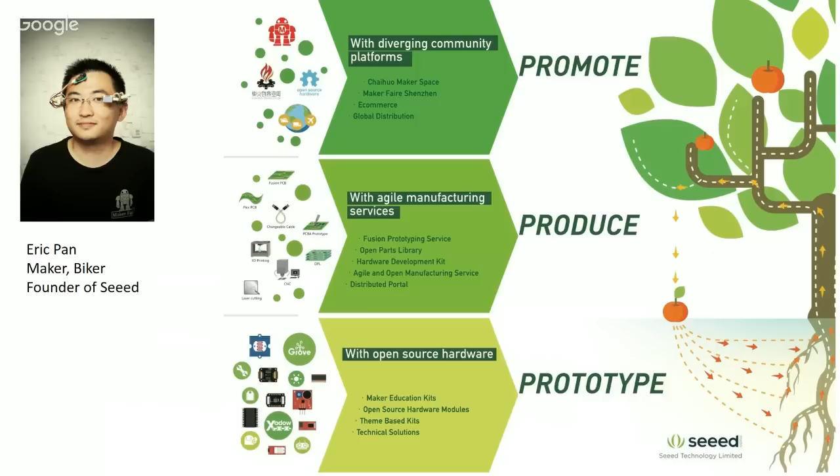Because we have done so many things, we try to categorize what Seeed is and how our business runs. We see the maker community like an ecosystem, and we are playing as one tree of it. So we provide open source modules for people to do prototyping. But what we are going to talk more today is how we help people manufacture in small volumes. And also we help to promote the culture, promote the community. You will find out more by Googling us.

First, I would like to give you an overview, because I think it's very important to have a different mindset growing from one piece to many pieces. We have a lot of workshops about prototyping, but too little workshops about how to manufacture things.

So if we look at the world from an open hardware perspective, it's more like a pyramid. All the makers have ideas, everybody has ideas, but whenever you bring them into a prototype, you become the maker. You're actually growing from 0 to 0.1. But you have to go further sometimes to have the first working engineering sample. You become a very veteran maker. I think a lot of Fab Lab students are working towards this. Like I saw from the last lesson, you have done some PCBs by CNC, and then you'll be soldering your own devices first.

But today we are going to cover how to grow from one piece to like 1,000 pieces. Whenever you have 1,000 pieces manufactured, you are actually becoming an independent product maker. You can call yourself a hardware startup, because you are not making one product for yourself, you're actually benefiting a larger audience. If all stars align, if everything goes perfect, you might want to ramp up to 10,000 pieces. That's where mass production actually happens.

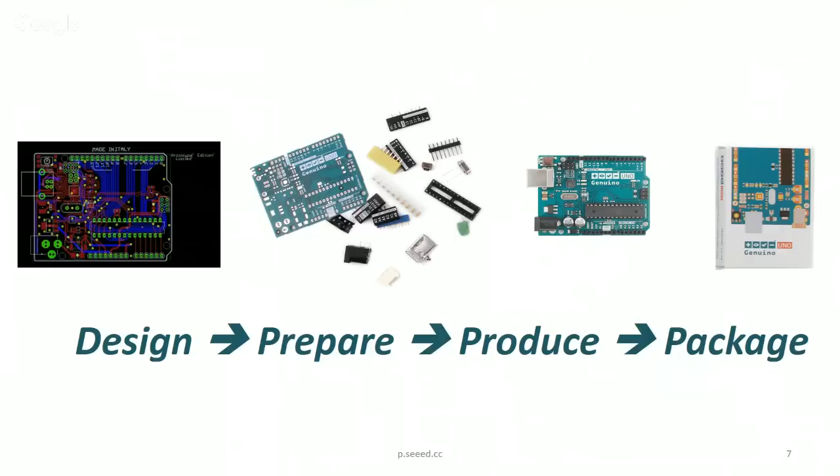None of this process is easy because you need to balance between the 3 elements: the cost, the quality, and the schedule. They are very much intertwined. If you change the cost, you might affect the quality. If you want to pull in the schedule to deliver to the market faster, you might increase the cost, for example.

Because the world itself is analog, the world itself is very random. You manufacture the same products with the same setup, same material, but you might also have some randomness, thanks to quantum physics or anything beyond that. What we need to focus on is to control the result inside our expectations. There are so many ways to do that, and so many factors that contribute to the defects. There are so many systems, knowledges behind that, but we need to understand that quality is equal from the design to manufacture to deliverable. The only matter is how do you promise to deliver and how do you achieve it.

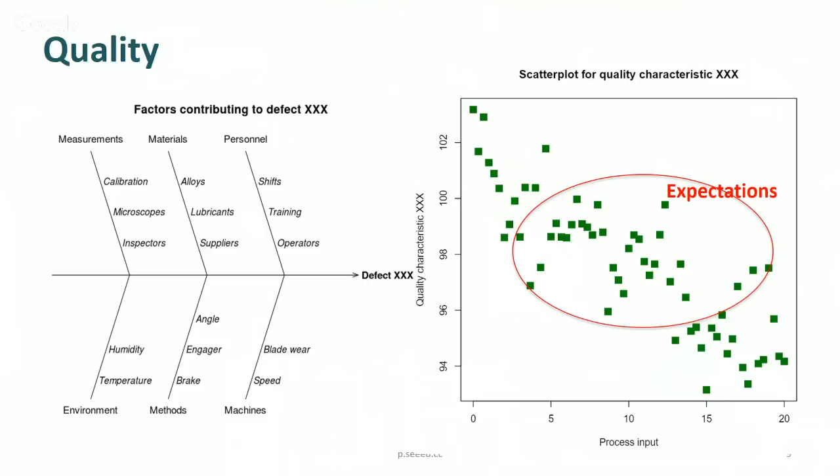So it can be affected by the personnel who operates it, the materials, the measurement used to evaluate, and also what kind of machines you are using, the methods you're using, and also the environment might also affect the quality.

And it might be a very nightmare for a lot of hardware startups because the schedule is always unstable. We have already seen so many Kickstarter campaigns that might delay for even more than 1 year, even cancel. So for the schedule, for the manufacturers, you have a lot of components that need to or shall arrive on time, but the supply chain is very dynamic.

For example, there might be some turmoil in some countries. For example, in Tianjin port in China, there was an explosion. And the result is, in that port at that time, there was an OLED shipment, and it was totally destroyed in the disaster. So in the following few months, we didn't have enough OLED screens.

No matter how good a plan you have, these kinds of disasters are out of control, and the supply chain itself is not static and might change. So we need to adapt to the changes. And also the production line has its queue, because the goal of production lines is to keep running to increase the utilization - they cannot wait for you forever. Whenever a new production comes, it usually needs to wait for the last batch to finish and start new ones. If there is any problem, it has to go back and wait again.

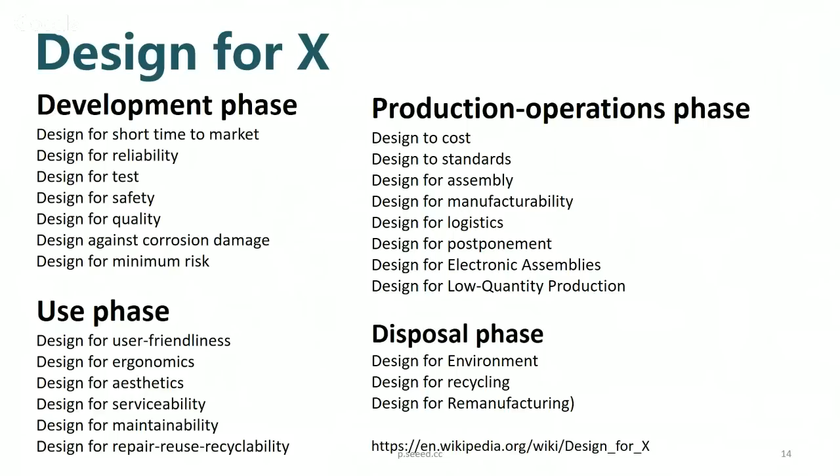We have a lot of issues because people come to the field like a software team. Software team is like a band. You might need only 3 or 5 people to come up with a design to make it working and post them on iTunes. But for hardware, you actually need a big orchestra.

You need a whole team with established knowledge of about issues about DFX. So a lot of teams, they come to play orchestra with a band. That causes a lot of issues because of so many things that you don't know.

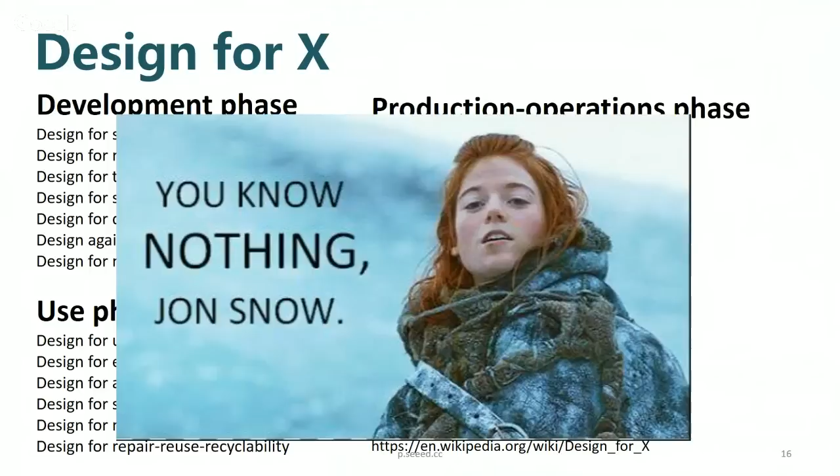You know nothing. It's slow because you know nothing. You didn't know so many things that the factories didn't know, that you are not a professional like their previous customers. Because we are newcomers to manufacturing, this causes a lot of problems because of the inequity of knowledge.

But the remedy, I think we look at manufacturing, design from it. A very important element inside of this is open hardware.

We use a lot of open hardware for prototyping. Maybe on your table you have Arduino, Raspberry Pi, so many open things. But it's also a perfect tool for you to consider the supply chains, because you're actually sharing the supply chain with other people using the open hardware.

For next steps, I think we need to open source the manufacturing processes. So we will understand all the strengths by looking at the manufacturing process itself and come back to our laboratory to design something that matches the process. I think that's a hope for Fab Lab, and also what we are trying to do is manufacture decentralized. It should be more like a service covering different locations with the same process and materials.

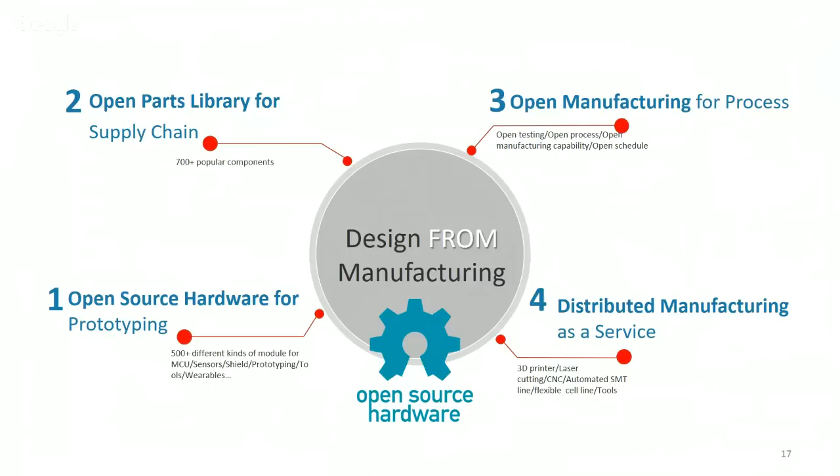I think that's where we can make the DFX or manufacturing much easier, because by different teams, different products, we are actually training ourselves and sharing the knowledge among different projects. That's a big word, but let's see the details.

About 3 months later, he started to make engineering samples to shrink the size, working with maker groups to do a layout over again. After half a year, he finally could use crowdfunding and SNS promotions to get the idea, 20 years later, into the market. But you see, the open hardware has facilitated the whole process.

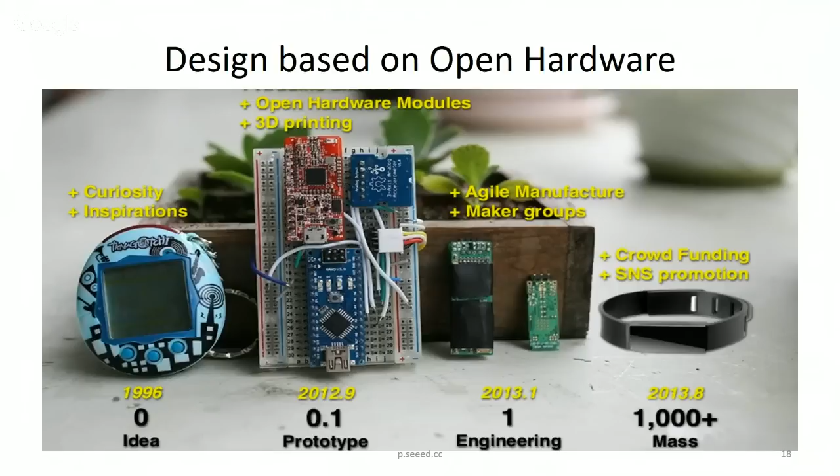Because we are having more and more platforms to suit different usages, and we have more modular sensors and actuators - they are actually combined together to come up with a whole solution. And we will have more knowledge sharing and support from different channels, of course, including the Seeed Wiki.

We also have project inspirations from Instructables, from people's blogs and Twitters. We are not only making the prototype easier, but looking at what people has done, has failed, has succeeded. We can follow their paths to facilitate the way we manufacture new things.

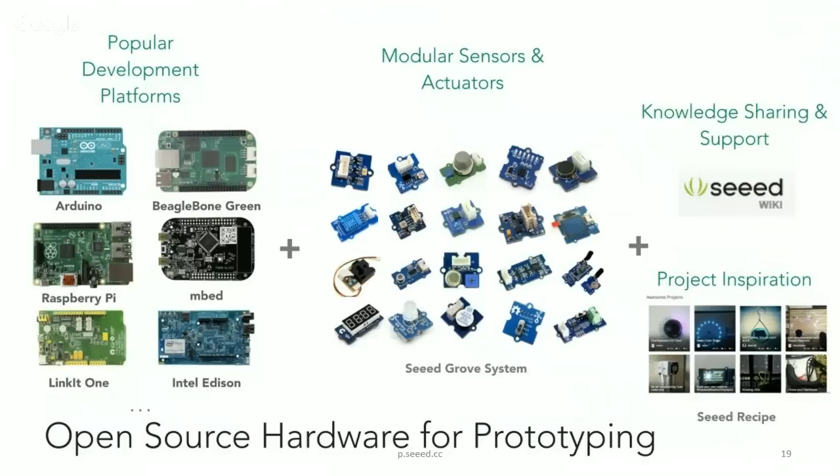Also, thanks to the CAD tools, they are becoming easier to use. They are becoming free, and they are more like cloud-based. You can actually open some cloud-based CAD tools and collaborate or find some experts to help you.

Because I think in the future, we don't need everyone to get very professional on how to design a circuit, but you try to reuse existing modules and try to come up with your own complementary circuits easily.

If we look at the PCB design process, it starts from need - what do you want to accomplish? Whenever you have a concept, you can use some open hardware breakout board modules to validate. And you will have the schematics to map the electronics together, and you do the layout to place the components where they are going to be. Then you need to do the routing, verification.

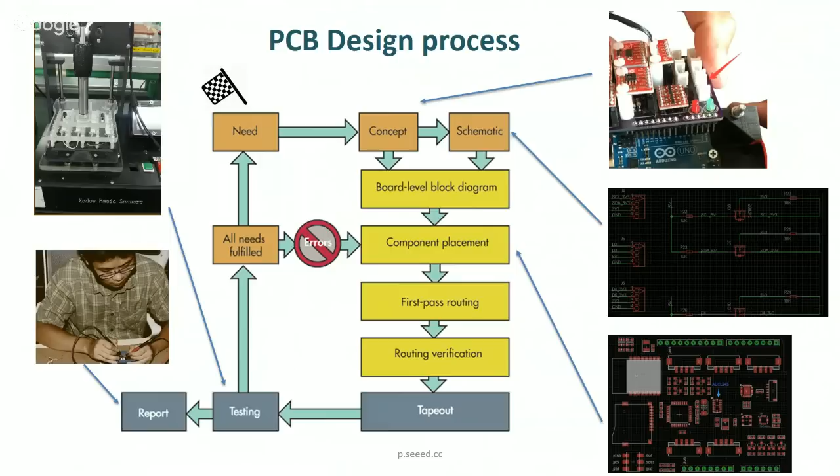So if everything is perfect from what you have seen at this stage, we can move on to prepare - we need to gather all the materials together. If we look at electronic products, I will show you some examples by hand, but there are so many categories. We can start from a few.

For electronic manufacturing, the majority of products have to start with PCB, and also the pairing stencils for solder pasting. One thing for that is quality. When you make the first PCB, it might be right, but whenever you manufacture several thousand pieces, there might be something wrong, like even for the printing of the silk screens.

I think for a lot of us, the major issues are on the components, both active and passive ones, like the ICs, resistors, capacitors, because you might meet issues on lead time and also quality. The lesser risk ones are standard mechanical components, like rivets, screws, nuts, and standard accessories, which might be very low risk as well because they're very substitutional.

For packaging materials, you need to consider them because they're part of your product, but they might also affect a lot on quality. The materials you use, the printing, the quality, the color—that might differ from what you were thinking.

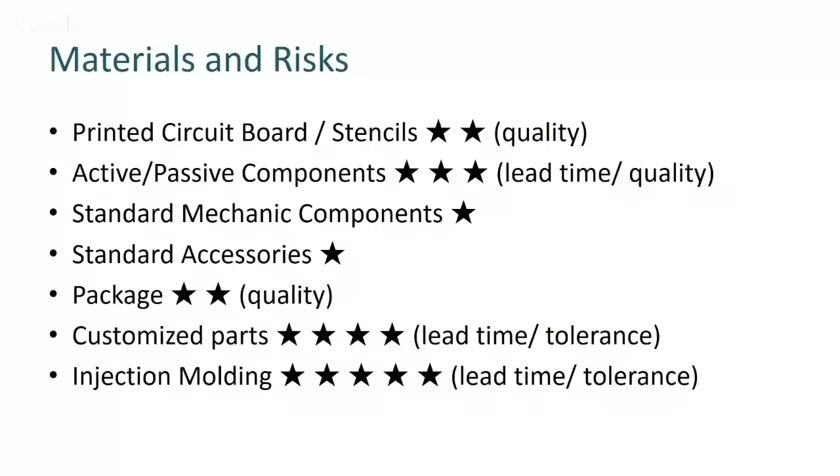If you really want to do injection molding, that's the most difficult one because you'll spend a lot of money, and the lead time is usually over several months, and in the end you still need to cover tolerances. Don't get too frightened, because we will see the bill of materials template.

This is a very normal, very simple one. We don't have so many items on it, but that's actually how you describe the things on your electronic board. You might have seen a bill of materials, but in real manufacturing, if you give the task to someone on the other side of the planet, you must make sure everything is right, everything is clear, and everything is feasible. I'll send the slide later so you can look into the details yourself.

There are some hints for bill of material DFM. Please don't assume people know what you know. I've seen so many bills of materials that just say, oh, here we need some screws—that's it. But how could I know what kind of screws you want unless I have the samples, unless I measure it? So don't assume people know.

You need to always have a plan B. What if the components you used are extinct? Usually we just take some components from our desks, or sometimes unsolder them from other products, but that component might be extinct or unavailable. So try to have a plan B.

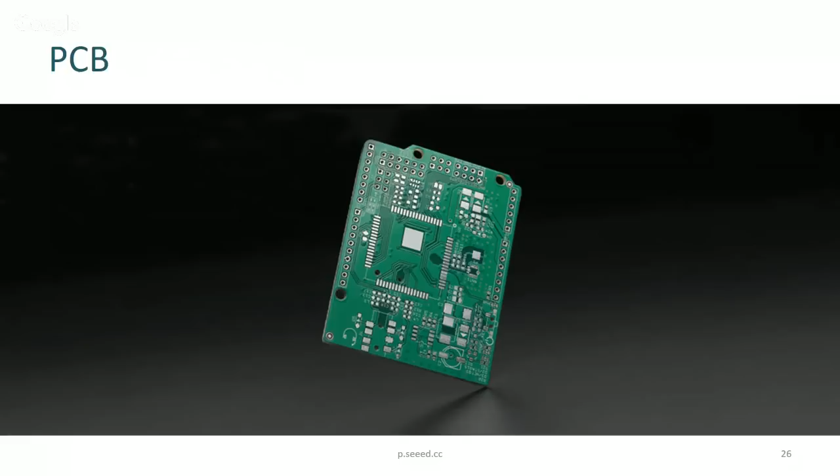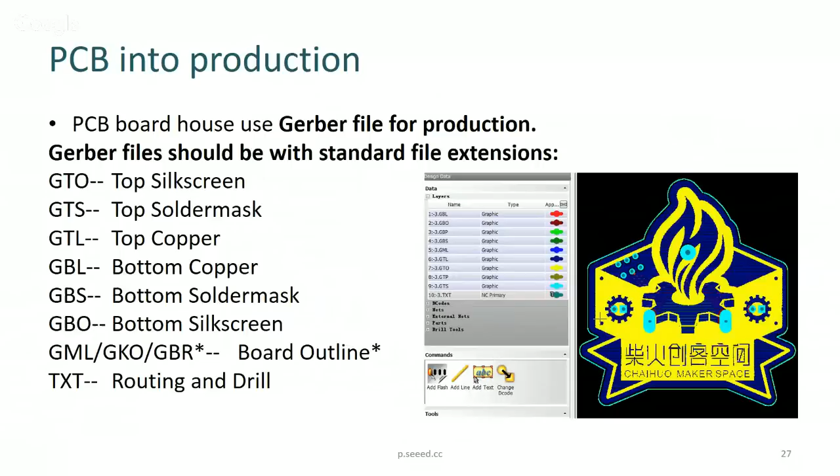Whenever you bring a PCB into production—you'll learn more about this later in Fab Academy—there are different layers: silk screen, solder mask, copper, etc. Here's a video; if it's too much latency for you, you can open the links at the end of the slide.

So this is one way of manufacturing PCBs, but there are other ways besides the homebrew PCB. We see companies like Voltera trying to ink-print circuits, and we have OtherMill, or you can use a desktop CNC to cut low-precision PCBs as well.

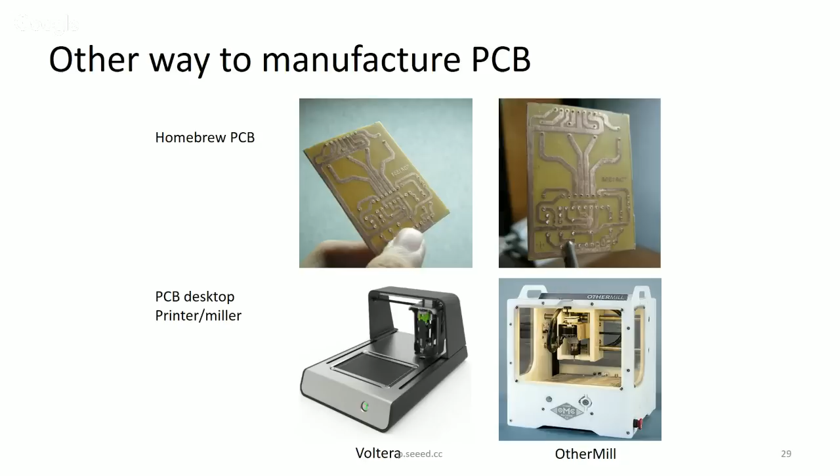For PCBs, we also have some hints for design for manufacturing. You need to look at the supplier's process spec. If your supplier is your CNC machine, look carefully at the precision it has. If you use a fab house to do the PCB, look at their spec and leave some buffer if possible, because that will increase the yield of the PCB.

And whenever you're designing the PCB, you need to think ahead about how people will assemble the components onto the PCB, so you need to make sure the components that need to be polarized are marked clearly.

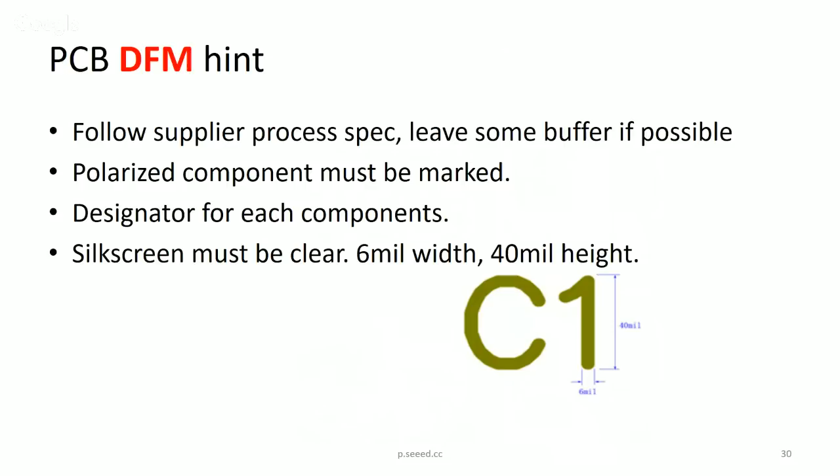But to do that well, you need to control them to like 6 mil width and 40 mil height. That's something that can guarantee the printing quality. Also, after you have the PCB and want to bring it into manufacturing, you need to have the stencils.

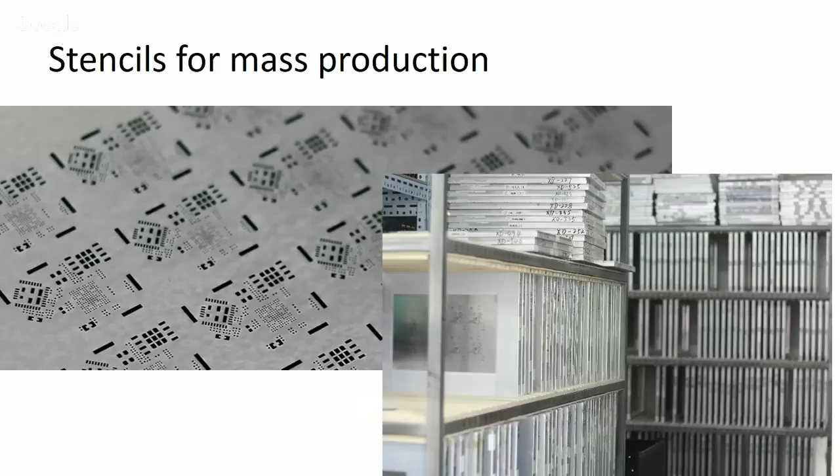It's very similar to silk screen printing, but now you're printing with solder. For each of the products, you might have a different stencil, and that causes a lot of waste. It's very critical, and we also have a room full of all the stencils, used and expired.

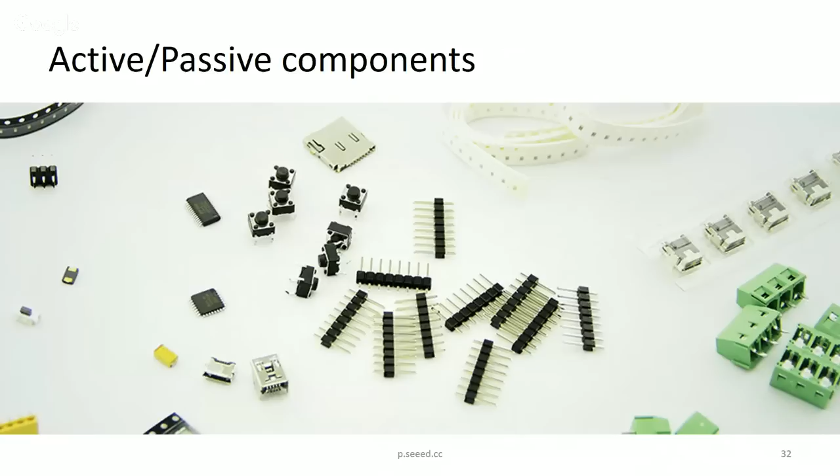You might be very clear about active and passive components, but I don't have enough time to explain in more detail. One rule is to try to use popular components. Where can you find popular components? One simple way is to find the most popular open hardware board, see what components they're using, and try to reuse the components they use.

Like, for example, ATmega328 — that's something you might want to share. For regular resistors and capacitors, that should be no problem. But if you choose a button, try to use a very standard, very popular button, or you might get jammed for a damn button.

We have an example here where we tried to calculate this. Among the projects we've done, the most popular 100 components consist on average of 30% of the bill of materials, which means sharing the library can mean sharing the supply chains. They can reduce cost, lead time, and improve quality, and it's a way for people to share knowledge.

Like Espruino, a project we did for a Kickstarter campaign a long time ago — it went from PO order to shipping in only 20 days. The only reason is that it uses a lot of common, very popular parts.

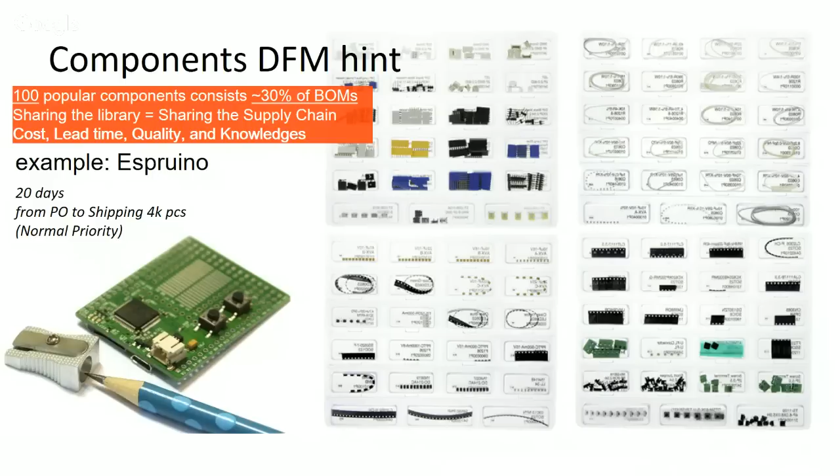We'll go into more detail — we have a new library called the Open Parts Library, and our friends at Octopart also created an Open Parts Library. You'll always try to work with the community to select the most popular ones.

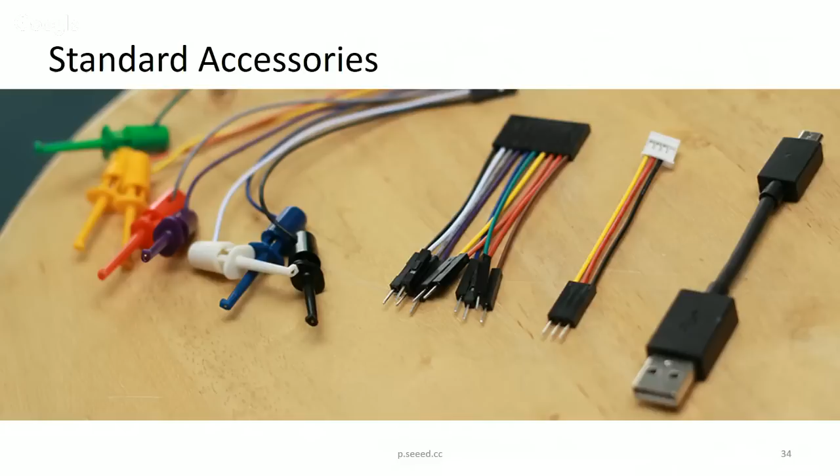We'll also have more standardized accessories, since they're too standardized. For small volume, you don't worry about them, but if you're in a larger volume, you might need to find a suitable factory and make a long-term delivery plan with them, to make sure all the quality aligns with your specification. Packaging is something you cannot avoid either, and it will totally affect things, but it's not the focus of our topic today.

But remember, it's also part of your bill of materials. You might want to include the static plastic bag, the stickers — everything into your bill of materials. Or you might end up waiting for them to complete the whole project. And then for customized projects...

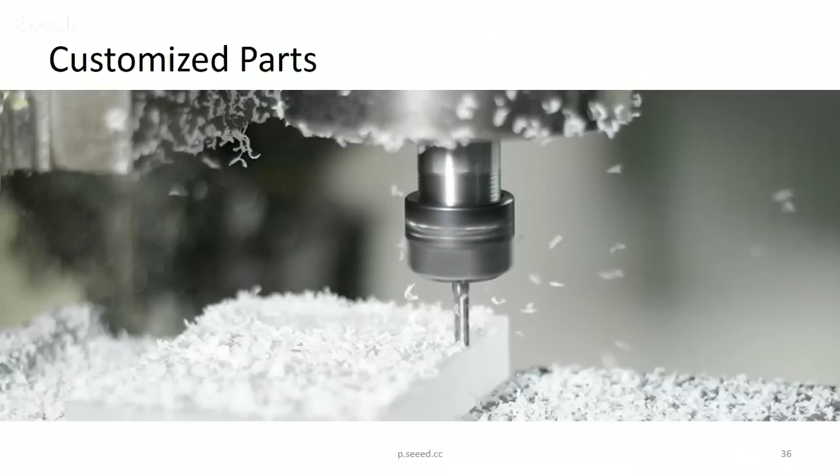I can give you an example where we try to align mass production factories with our laboratory, which means if we can customize on our own equipment, and we find a factory that has thousands of the same equipment, it's much easier for the customer's customized parts to get duplicated. As for injection molding, I think it's a very painful process to introduce, so we'll leave it for some other time.

And finally, imagine that we are cooks, we are chefs. We have all the ingredients lying on the table. And the nightmare, the real nervous moment, comes whenever you assemble. Only by assembling can you find a lot of the mistakes — you realize, oh, I have bought the wrong materials.

It's not fun, and if we look at the whole assembly and test process, they can be very complex. But why are we doing assembly and test?

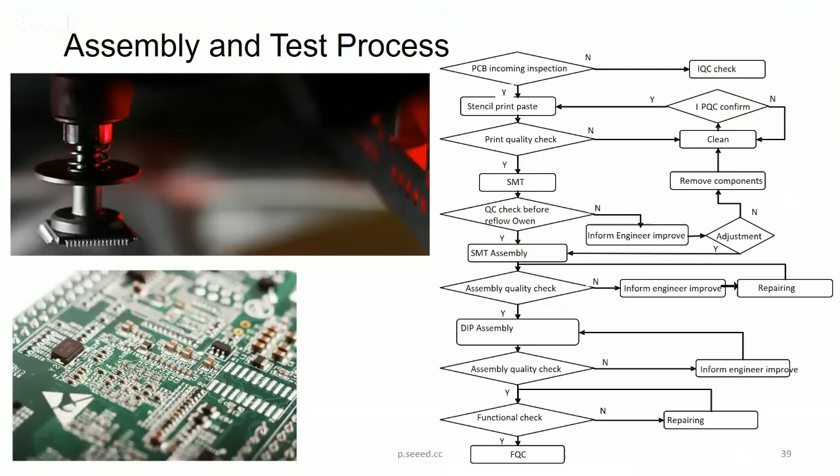It's because you don't want to do it yourself. You have to make these tasks as easy and repeatable as possible, and give them to someone you don't know to accomplish. If people don't know you, they need to follow some programs. We talk with all the files, all the SOPs, standard operating procedures, to make sure we have the right deliverables which match our expectations. So it's very important, and we need to respect the whole process, or you will be affected by what you have designed.

So this is how we put the solder paste onto the PCB board. The first layer is the stencil, and the solder will go down to infiltrate into the PCB itself. That's very simple, but this also requires a lot of precision, and the way you do the stencil might affect the result.

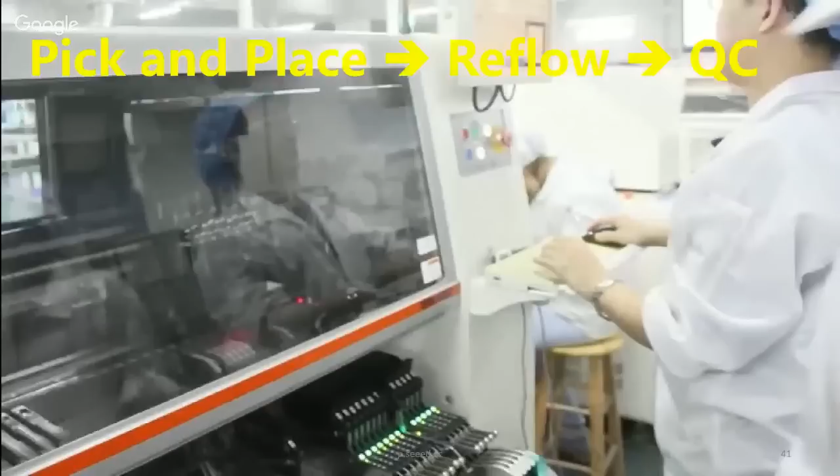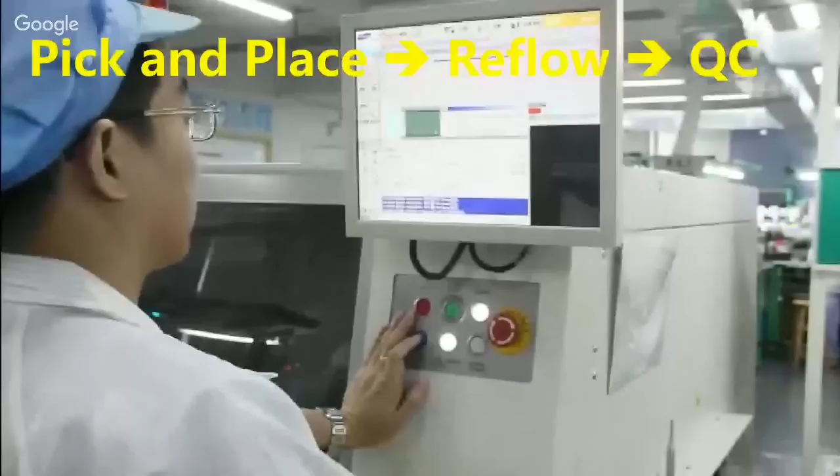Next is the pick and place machine, and also reflow. You might have already seen the pick and place machine. They're actually doing something very simple: putting the components onto the PCB which already has the solder paste. But imagine you have to put so many components onto so many PCBs, and make sure they have the same result, make sure they're fast enough to save time, and make sure they don't make stupid mistakes.

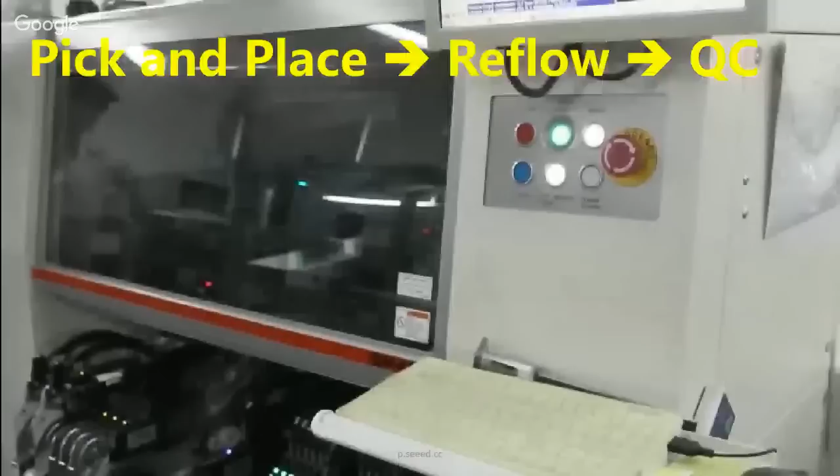So you will see on the screen they have some optical alignment. This is the mark point, and this is the pick and place height. Sorry, it's a bit dark. On the bottom of the screen, there are reels of components.

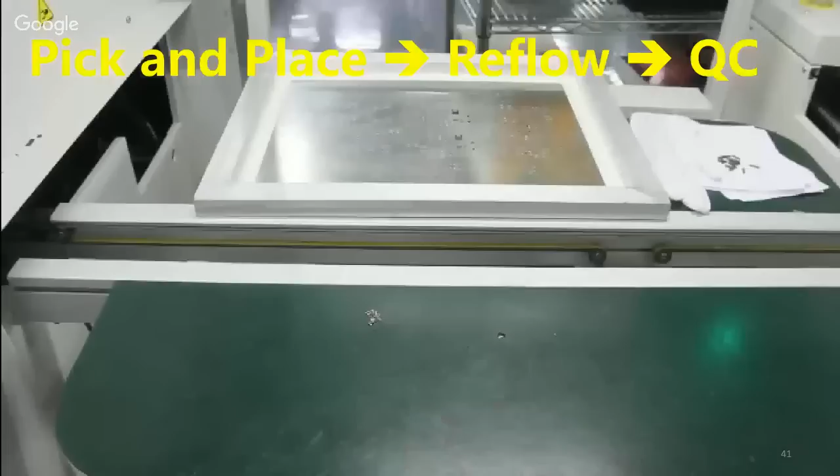Please, if you have time, watch the video over and over again, because you will know how the machines work. And on the other hand, you can design according to the performance and behavior of the machines. So whenever pick and place is finished, the components are like glued to the PCB.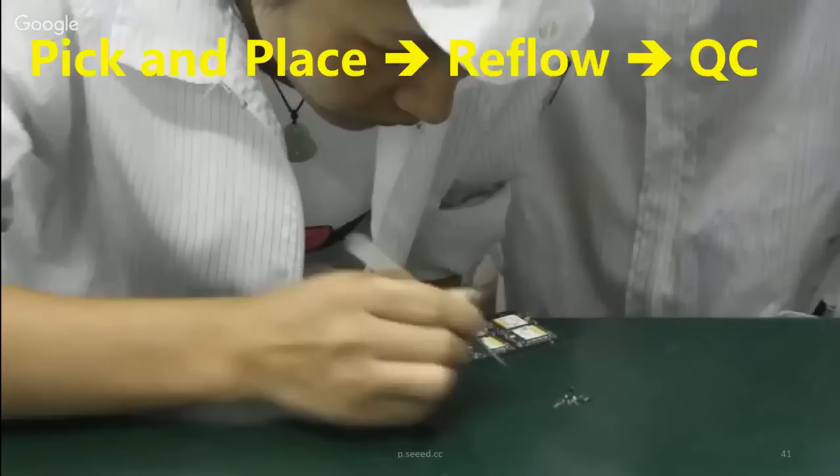They will do a visual inspection to make sure most things are right. But they are like uncooked - they need to be cooked. And if there's something too big to fit into the pick and place machine, sometimes for small volume we use hands manually to put them onto the board again. And that's the oven - it's actually an oven, but with more precise temperature control.

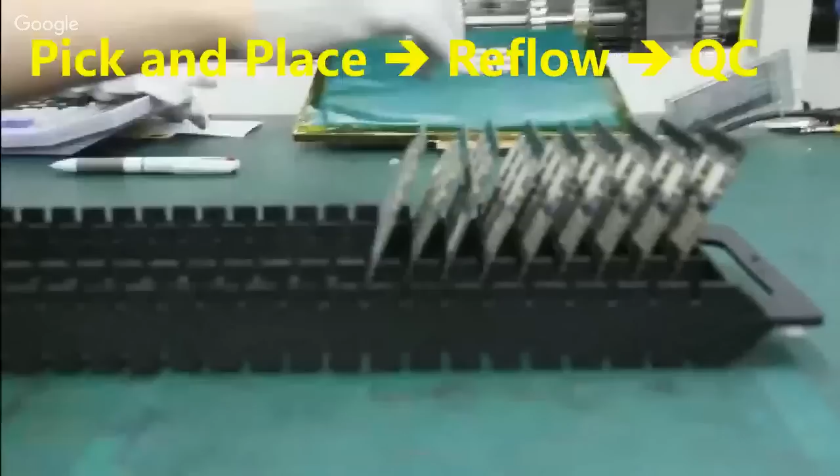After going through the oven, we mostly finish the assembly process because all the components are in place on the electronic circuit board. And then they will do the QC check again. I will show you some examples of why we need to do so many steps to control quality.

As we just explained, the reflow oven is an oven, but the difference is they have several zones. Actually, the more heating zones the reflow oven has, the more precisely it can be controlled. So it has preheating to make sure things are warming up, and then thermal soak, to make sure all the components are warmed up to an extent that's ready to be reflowed.

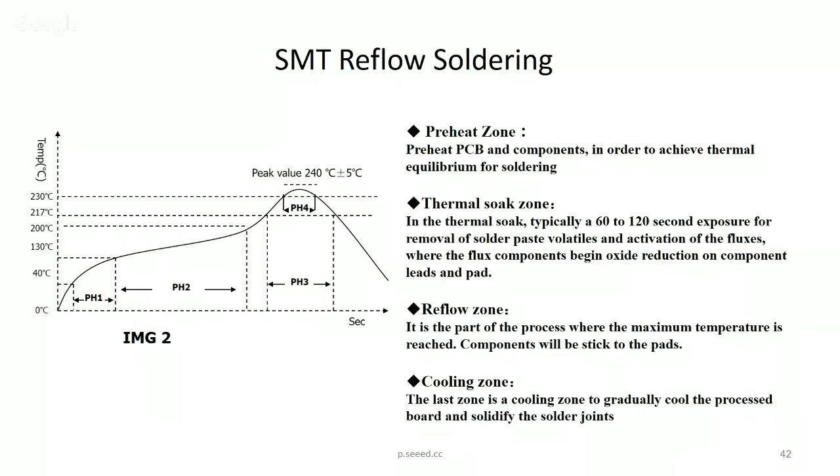I don't think I'm going to explain so much about that, because you can dig into the details, but it won't affect much about what you've done for design. But it's good to know. And more important for us is to understand the issues - we are sorting the issues.

The biggest issue for SMT is like tombstoning. The SMT components should line up perfectly on the surface, but sometimes one end comes up because the components might not match the dimension of the actual design - meaning the PCB footprint doesn't fit the component itself. So making sure the pad matches the package of the components. Also, we have soldering issues, meaning the solder is not stable, not totally heated. The cause is actually the pitch - they are not matching the components' dimensions.

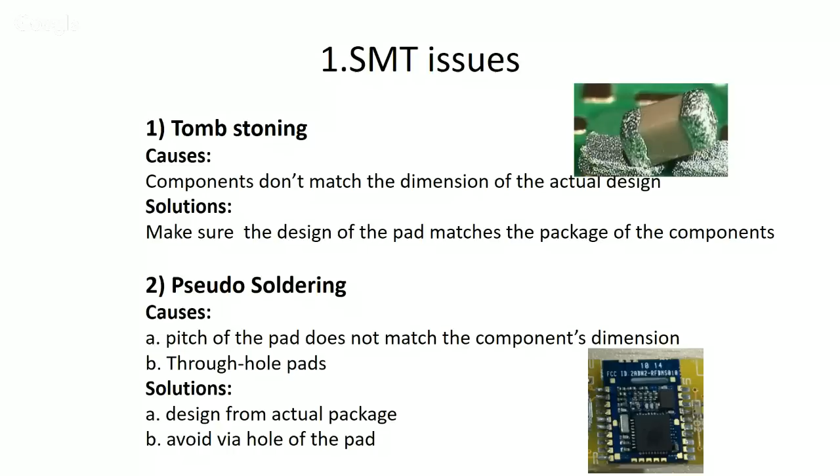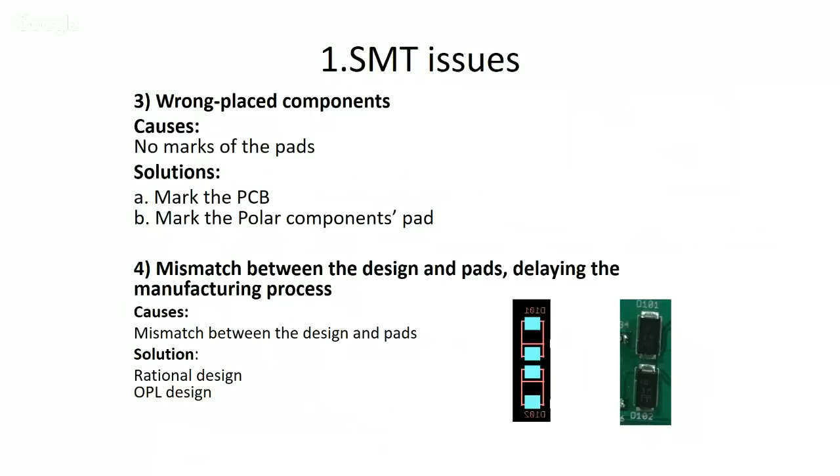You might get your design working in the first piece, but imagine in the long run, in a more complex process on the other side of the planet, they might have more issues than you expected. Also we have more problems, like there's no mark on the pads, so there might be errors if we have to process manually. And there might be some mismatch between design and the pads, causing problems in the manufacturing.

So these are some specific cases, but generally speaking, I think we need to have some compassion for machines. Machines are not slaves, they are our partners, they are helping ourselves. So we need to understand how the machines work, and comply ourselves to try to collaborate with the machines to make sure our designs can be easily done by the machines.

From that, we have one more tip: we need to align the same components in adjacent order. For example, from the video, the pick and place machine gets the components from the reels and puts them onto the board.

So if we target the same reels, it can be much faster than switching to different ones. You should leave enough margin to the edge of the PCB, because there will be some belt on the edge, and there might be some grippers. If you put the components too close to the edge, they might be moved. Also, in the video, we're soldering them on one side, which means if you put even one component on the other side, we need to do it over again. So let's try to put all the SMT parts on one side of the board.

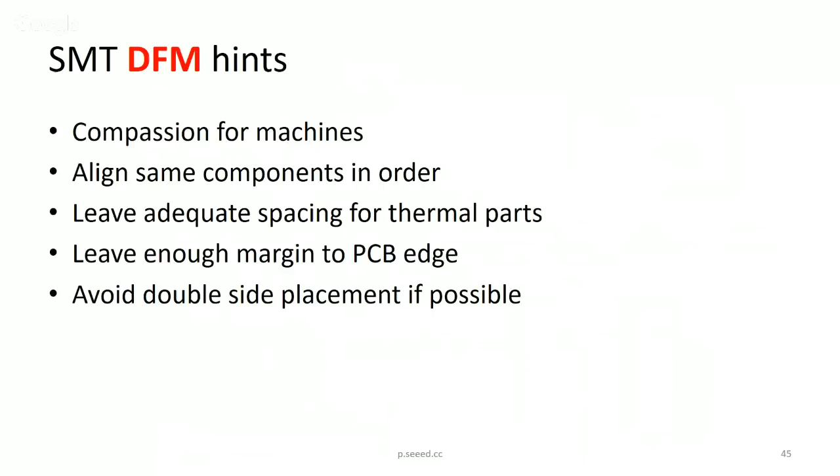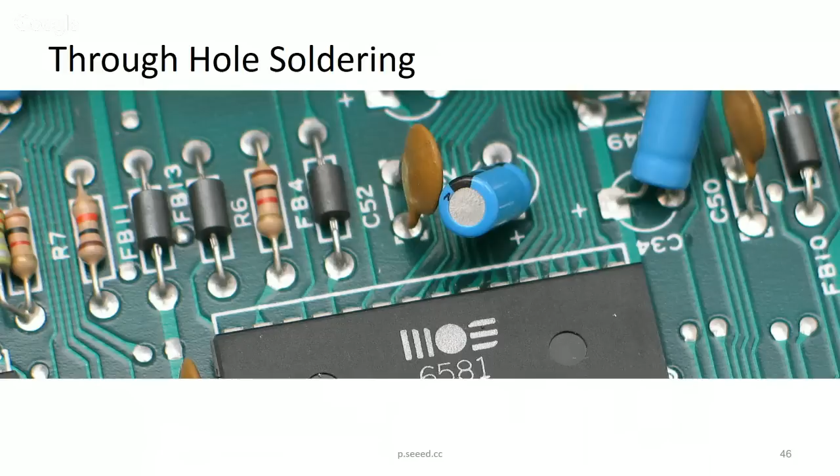Especially for the open hardware community, we have more through-hole soldering than everyone else. It's easy for hand soldering to verify in the beginning of the process, but it's actually difficult. This is a semi-auto through-hole soldering machine. I don't need to explain how to solder them because you can do it yourself, but essentially, all the boards, whenever they're placed in the right spot, sink into the heated solder and come out.

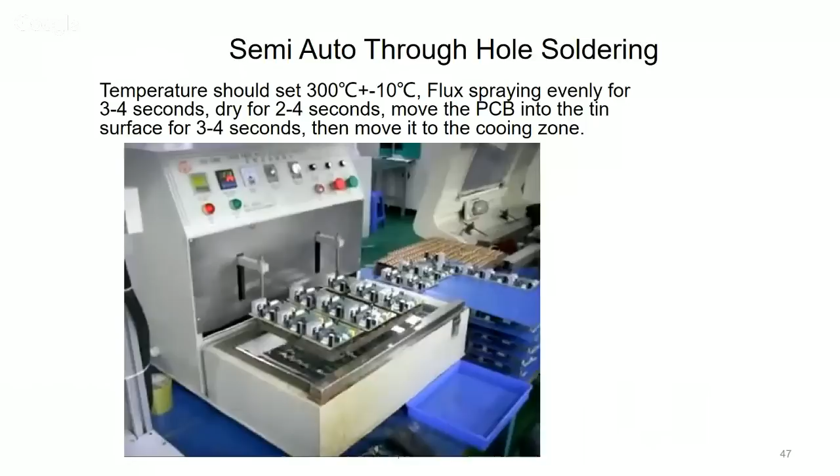We always say electronic manufacturing is very close to cooking. This is the part that actually makes it mature. It has to stay in the hot solder for quite a while. You will see smoke. They are crying, but that's their destiny. After a while, they come up again. Okay, perfectly soldered, or we can say it's like glued.

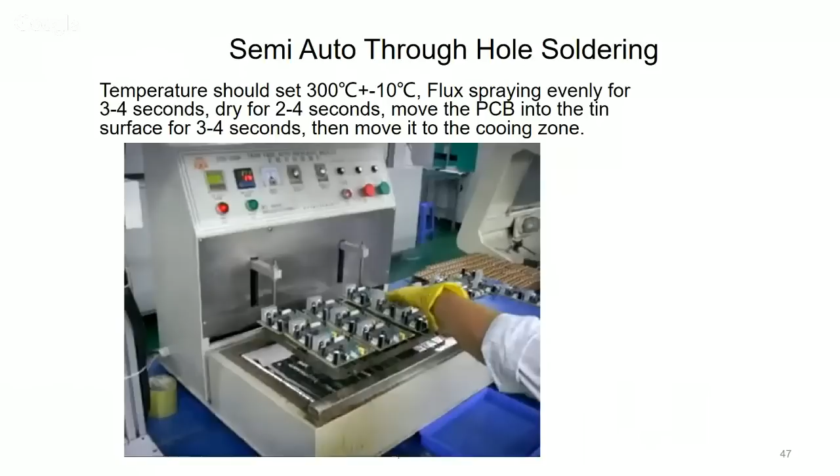Be sure to wear gloves because it's very hot. I think the process is evolving as well because you cannot avoid some issues. Sometimes you have too big components, sometimes you have pin headers, and we have some automatic soldering machines, and this is one of them.

So this is like robots. You may see that they require some specific fixtures, and you also need to program it. Okay, I can watch it over and over again.

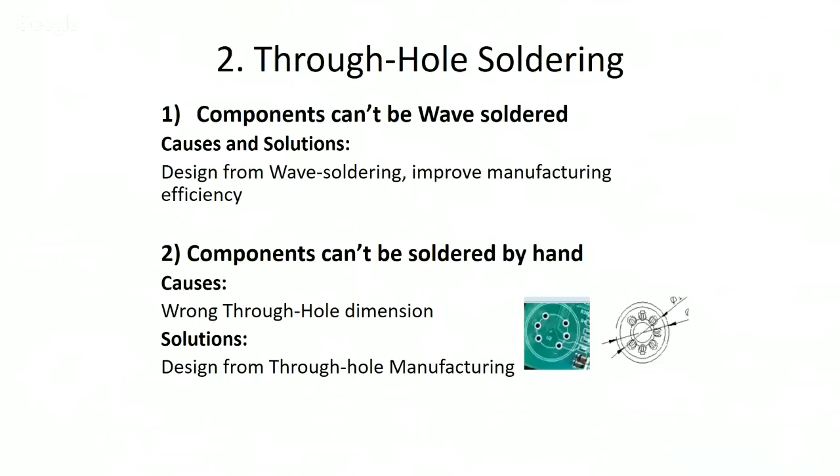Sometimes the components cannot be wave soldered because their design might affect the process. Sometimes components cannot be soldered by hand because the through-hole dimensions are too small to insert the components inside. Or maybe you're buying different batches of components that don't fit into your old designs, so you need to make sure all the dimensions align. Also, there might be too short a distance between two components, making it difficult to solder, whether for machine or human beings.

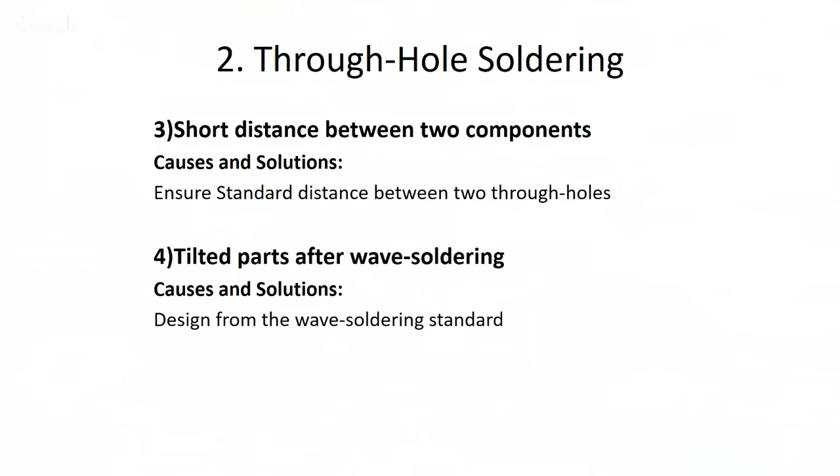There are also some tilted parts after soldering. You might need to strengthen them with some tabs or extra support. So for DFM, if we could come back and redesign, we need to keep space for each component, at least 0.5 millimeters, and ensure the space is enough for manually soldering, repairing, or verifying. More importantly, please avoid through-hole soldering if you can, because it really does not fit for mass production.

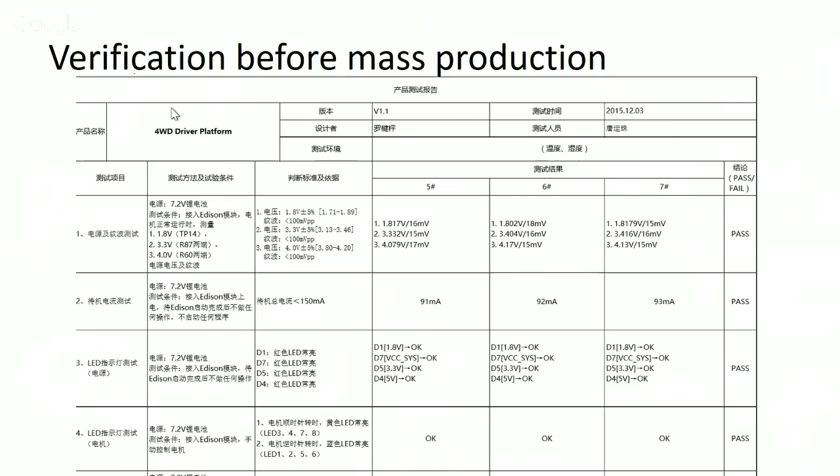This is before we do mass production. We need to do a lot of verifications to make sure the first sample will be working. But this is just a start. We will have some performances, some functionalities we need to verify, but you need to design a plan to accomplish that. There are so many test methods and priorities. Priority means how important it is to us, supposedly for the simple open hardware projects.

PCB inspection systems, there'll be like e-test, there'll be some visual inspection. We don't need to worry much about that because they are usually done by suppliers. Secondly, there'll be ICT, called in-circuit test. It's very common for simple projects, and we have used a lot of them, and you might be using that. And also we have some functional testing.

They are more for complex projects like IC or wireless things. And also for complex logic systems, you might have some JTAG boundary scan testing. I think if you have some system like an Android project, you might be using that, because there's a very difficult way for you to measure all the memories, etc. But for usual testing, you need to combine some of these testings to make sure you cover all aspects of your project.

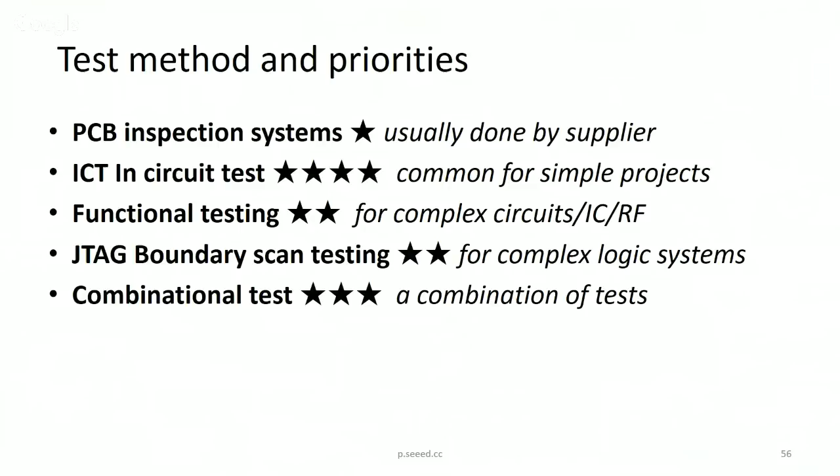So what is a good test plan? I think I have asked some experts and they don't give me a good answer. I'm trying to summarize it like this. So a good test plan is actually a killer, a good killer of defects. The most important rule is like a firewall: no underkill. Underkill means it's a defect, but the test plan does not tell it's a defect and lets it go. So it has to make sure it excludes all the defects.

But whenever you have all the test means to make sure the quality, you don't want to have too much overkill. Overkill means it's a good project, a good product, but you might set some threshold too tight, or it might be disturbed by external elements that you think are wrong. So the best is we examine the units once, and we tell the good from the bad for once. And the testing has to be fast. It's very important that we don't want to, on the manufacturing floor, use half an hour to test one device.

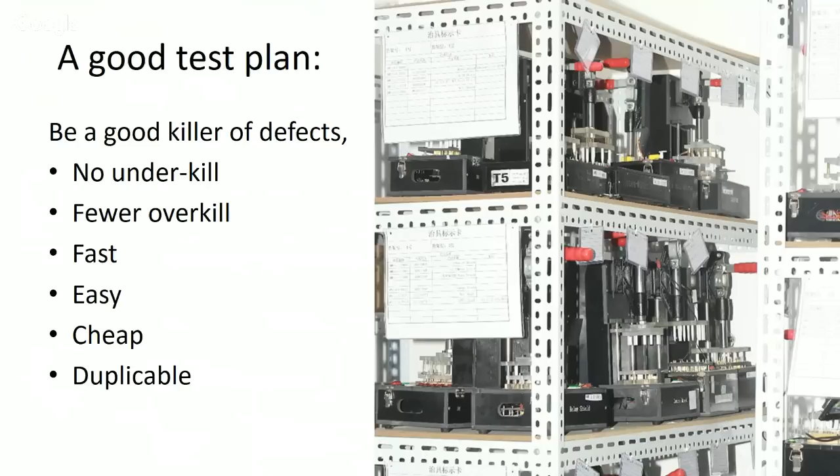Especially for the test fixture, you don't want to spend too much money on that, because you might need to make a lot of them to manufacture more of the products. For example, we might have very fast pick and place machines, but whenever you are testing them, how fast can you test 1,000 pieces, 10,000 pieces? One test fixture might not be enough. You might need 10, or you might need to panelize your products so that the test fixture can test 10 pieces at one time, for example. So bear this in mind.

And this is the legendary test jig. There's no rocket science inside. You open it up, and it might be just an Arduino. To the left of you is what you see when it's operating. It's better to have some buttons, the basic UI—I know you guys are very good at that. And also better to have some screen, or maybe in the future we have some wireless network to collect the results. What we show here is a handle, so it's a manual testing fixture. It's cheap, but whenever it goes to large volumes, it can be automatic.

I suggest in the future you might want to design the test fixture as you are designing the product. The test fixture can be as simple as an Arduino with some special circuits to measure the input, output, voltage, current, etc. And you can use a laser cutter or CNC to make the box. You can make it much cooler. This is just some enclosure we get from the local supplier.

And the most precise thing is on the test bed. It's like needles on the bed, but you need very precise holes to make sure they match your product. And here is packaging with the standard operation procedure.

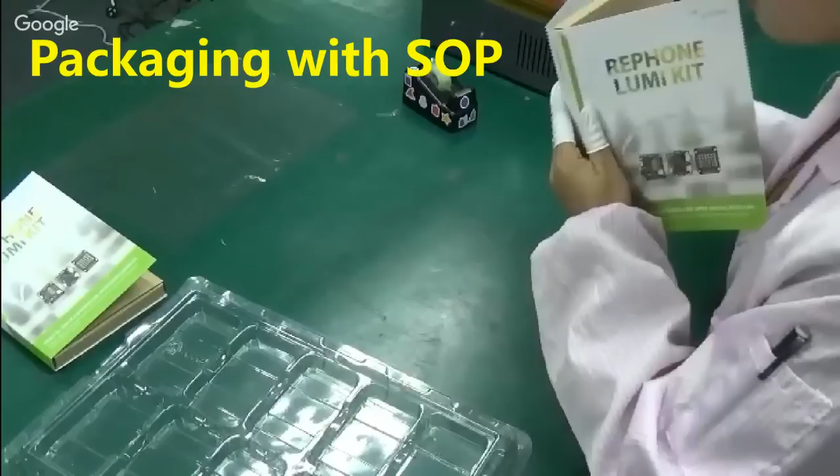It's more than just putting things into a box. You need to put them in a sequence, and you need to make sure everything is placed in the right direction. People might make mistakes, but we can design to make sure nobody can make mistakes.

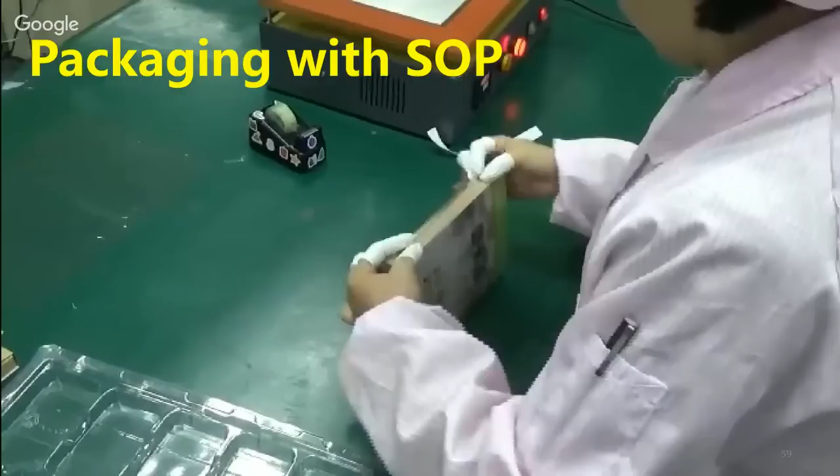Sorry, this will be jumping. So for the testing, sometimes we cannot make a test jig because there's no test plan for design. We need to really consider it.

And as we can see, assembly is a process, and we need to make sure that not only the designer does it by ourselves, but we could also ask someone else to do the assembly according to your given instructions, to make sure they are executable.

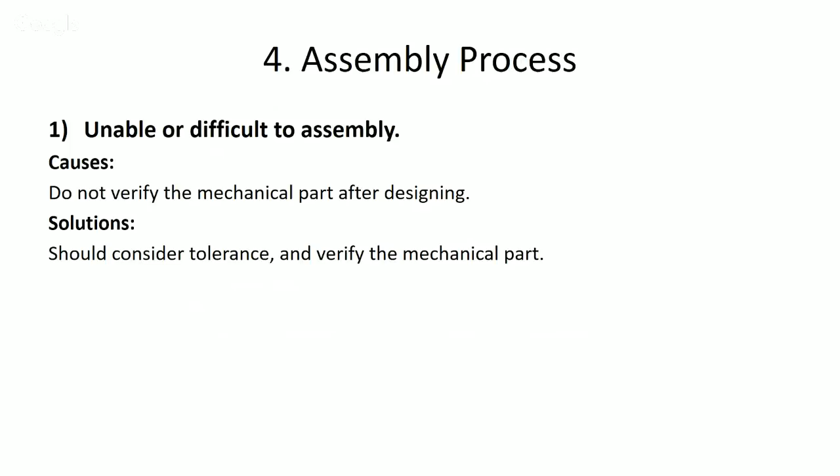And for packaging, people might not know how to package them because there's no clear instructions. And also we meet a lot of unreasonable packaging methods.

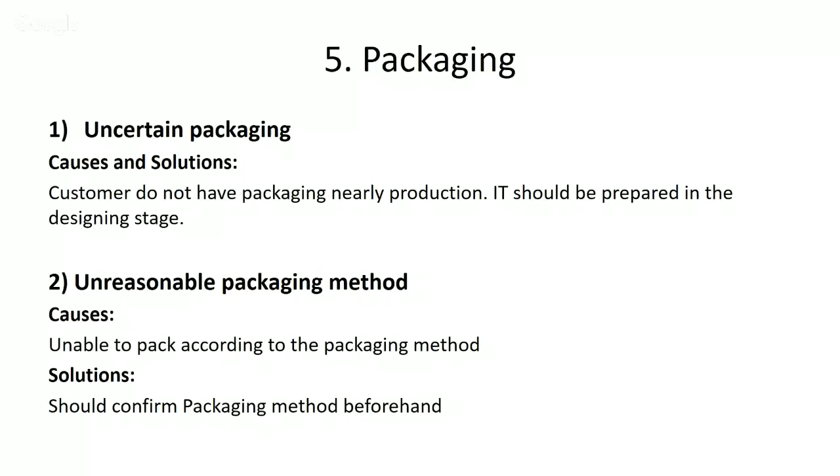So generally, for assembly and test, we will try to involve less process, which means if we can avoid through-hole assembly, we don't do through-hole, and we make each process count. And also we need to have the SOP, standard operation procedure.

It's very critical, it's like programming. This might be impolite, but you're actually programming someone else to make sure he follows your expectation to accomplish the manufacturing process. Of course, they can help you improve it, but you need to think in their shoes.

And we try not to invent in the process unless there are very critical reasons. Whenever we are manufacturing in large volumes, we'll do a pilot run for manufacturing a small volume, like 100 pieces. But don't expect the pilot run to expose every error, because it's just 100 pieces, and it might only cover a small fraction of the basic problems.

And there is a doom: whenever there might be a problem, if you avoid it, there will still be a problem. So don't overlook any possible risks.

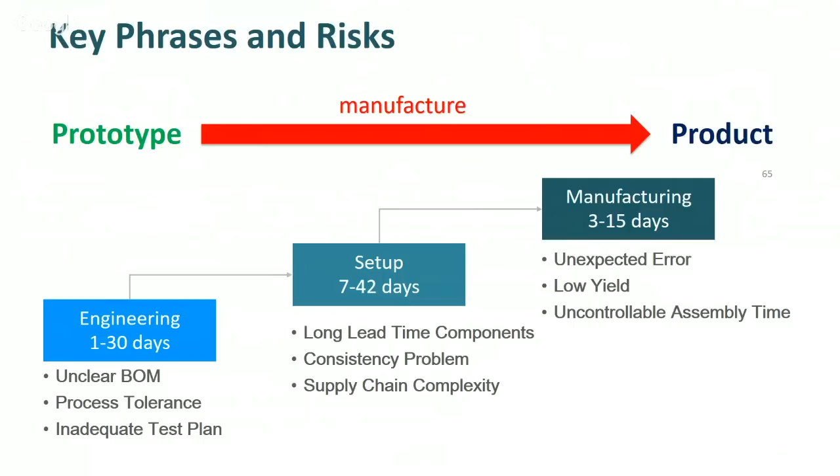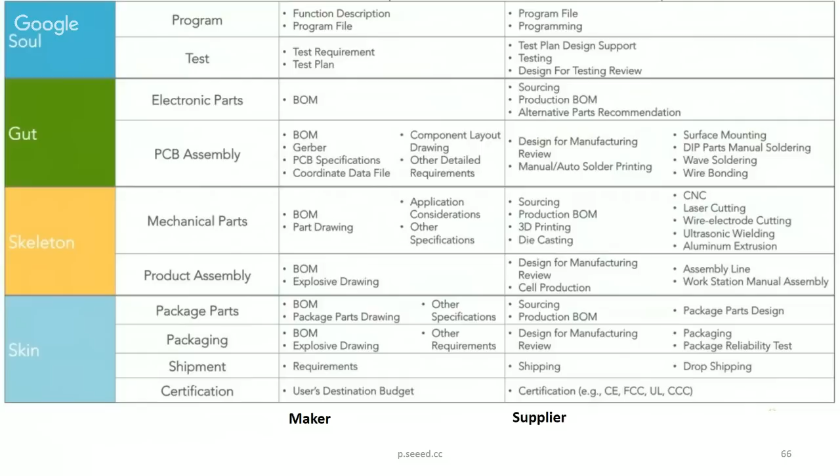So if we can categorize the things we need to do and what the suppliers need to do, you can refer to the chart. I'm not going to read them, but you need to watch the slides afterwards. And you really need to consider the shoes of a supplier to make sure what you have delivered, they can start something good.

And tips, again, for indie products for several thousands, there are 5 simple tips. First, we need to balance cost, quality, schedule, and consider the overall cost. It's not only the material cost, it's everything, including your time. We need to use popular components to avoid risks or problems. Also, try to involve fewer processes as possible. And this might be a stereotype, but please try to use SMD components if possible.

Okay, I'm not sure I have the right to leave some homework, but I will leave you some practices and you may try to do that. I did this in the last Open Hardware Summit. It's a very important process to try to manufacture something yourself. Let's start with something easy.

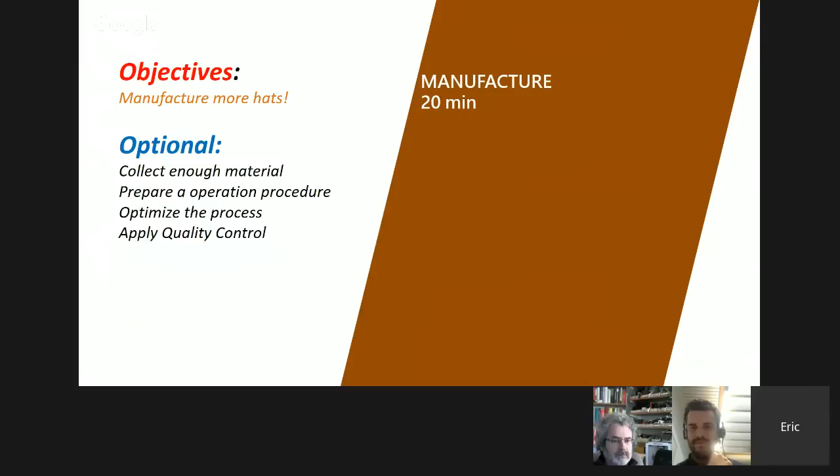We will have more details in objectives, but to save time, I'm not going into more detail. The major objective for design is to make the first hat, the engineering sample; for pitch, to sell the designs to the backers; and for manufacturing, to manufacture more but make sure they have good quality. Also show us the results.

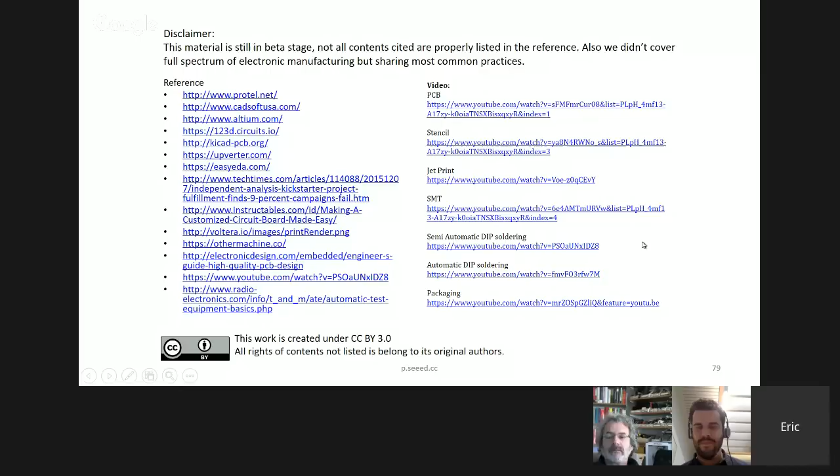Let me switch back into the video. Perfect. Thank you very much, Eric. I don't know if you noticed that Neil is just joining us. Hi, Neil. So, Neil. Hi, Eric.

Long time, good to see you. Good to see you. Yeah, so we are in the middle of our factory. Sorry, say it again.

We are just inside our factory. I chose this place to do the lecture because after the lessons, if people are interested, I can show them around the real machines and the real things in the manufacturing floor, to give you more perspective. Also, I'm open to more questions.

I'm not sure I can answer all of them, but I will try. So I'll start, I have two questions, but to start, just do a quick pan around so we can see the scene where you are. Yeah, let me try. So, because it's the middle of the night.

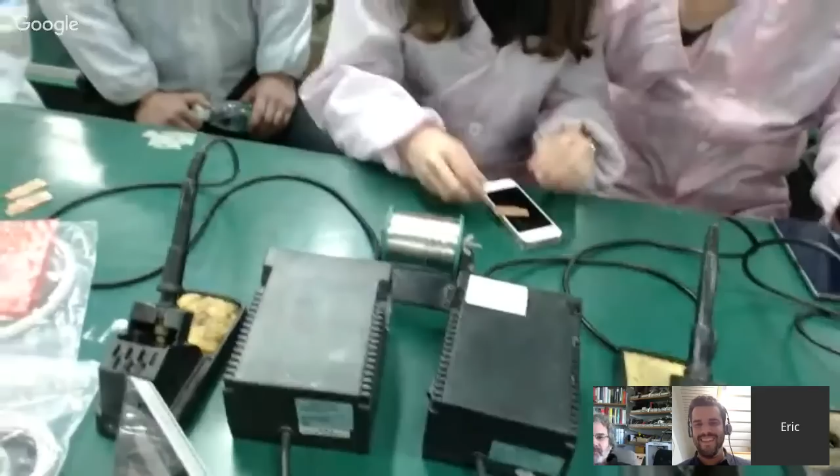Oh Eric, you're mute and we lost your video. Oops, give him a minute to come back. Yeah, that's it.

Send him a note. How many viewers are there, Tomas? At the moment... 95, that's great, the max was 110 actually. That's great. Okay, you're back Eric. Okay, I'm back.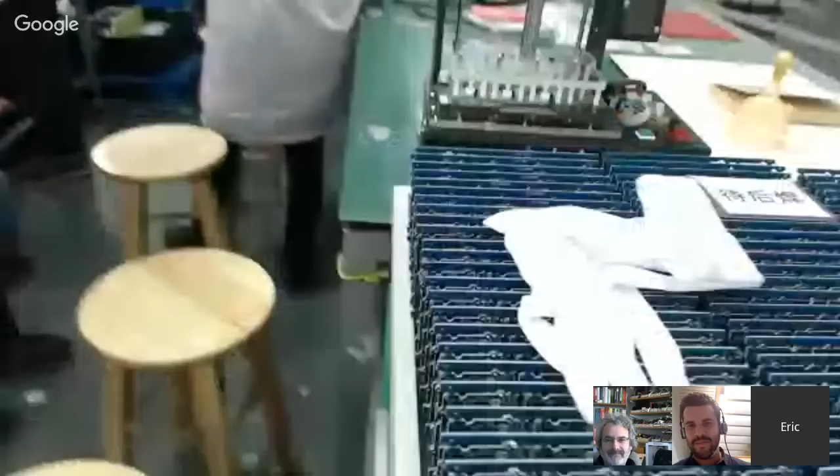And say hi to the team again. Hi. So a little quick pan around. That's the factory we are having, it's empty because people are not working overnight. And that's the machine we're talking about.

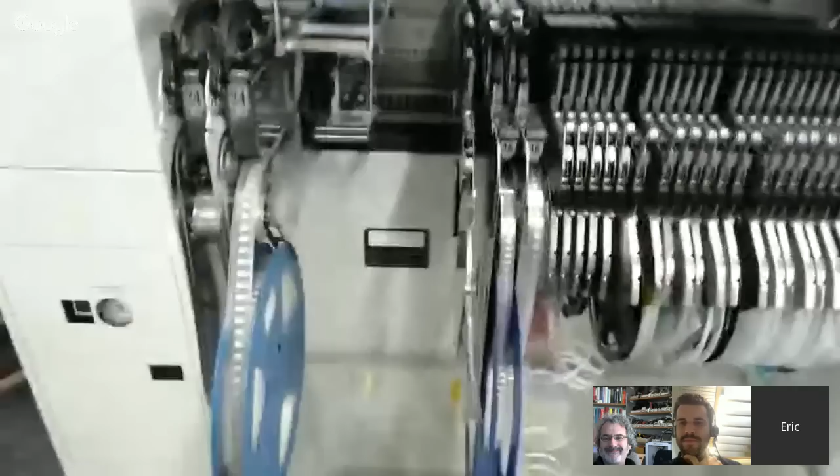This is where we put in the PCB board, and this is where we put solder paste onto the board. It's silent, it's sleeping. And that's a pick and place machine, you see all the rails, each of them is one component, and you'll see more rails on the other side, like magazines.

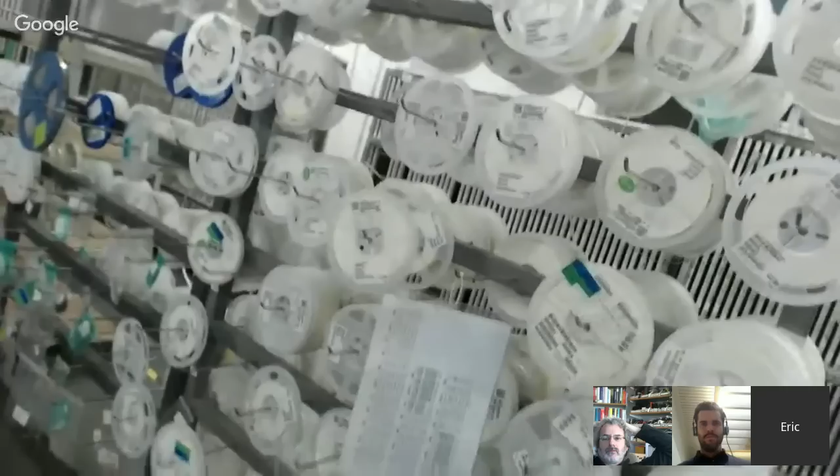So here we see this is some info for people to see the layout, and whenever they're putting components onto the board, there are some marks that will match the components according to the bill of materials, and here are some SOPs, the basic operation manual for people to follow. And that's the entrance to the kiln, which will be heated to 200 to 300 Celsius. That's the reflow oven, and after the reflow oven, people will verify them, so you'll see some in-process boards.

Great, okay, let's get to some questions now. Yeah please. So first, what time is it? Sorry, what time is it there? Oh, it's 11pm, so we're having our Yuanxiao festival, which is the middle of the night. Good, thank you for staying for us.

So I have a smaller question and a bigger one. The smaller one is, if somebody from the Fab Academy wants to work with you and Seed to transition to commercialization, what's the right way to work with you? How should they contact Seed? I think in the future they have to go through the lecture first to understand all the problems of design for manufacturing. And of course, they can contact us by so many means.

They can just go to our website. Well, that's what I want to say, so they've come to your lecture, they'll do a final project, they've been reviewed, everything's nicely set, what's the best way for them to contact Seed at that point?

I'm joining the Google Plus group, they can just find me there. Also, in the slide I will leave a message with a contact special email box so people can just write. Okay good, add that. Also Neil, one comment on that is we have one product actually going from the Fab Academy to Seed, the Smart Citizen. You can announce that, great. Okay, now here's the bigger question.